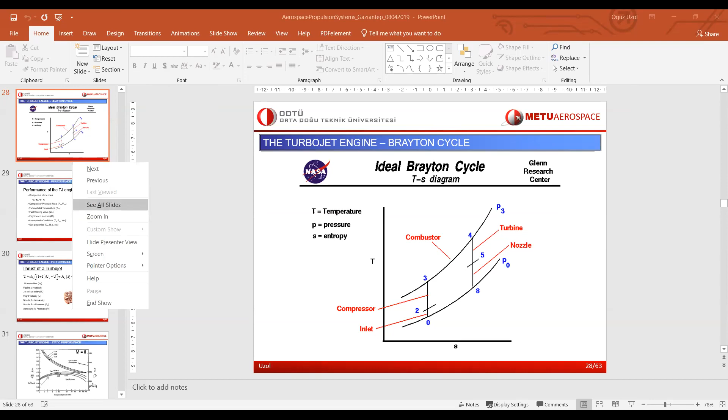However, have you seen the non-ideal cycle in propulsion? Yes, you have already seen the propulsion one. Let me get a pen. We did.

So the non-ideal cycle, of course, for those of you who attended last week's class, during the break we basically went down and took a look at the engines. You see that it has many components, and in this class we will discuss these components, but these components suffer from losses, okay? They are not ideal components, they suffer from losses, and these losses are not visible in this ideal Brayton cycle.

Whenever we have, first of all, do you understand when I say losses, what do I mean by losses? For example, let's say in a compressor - we can walk down and see the actual compressors downstairs - but in a compressor, what could be generating losses, for example? What do we lose? Total pressure.

Friction causes the losses, yes. But what do we lose? Energy, energy, okay good, we lose energy. More specifically, I can say kinetic energy of the fluid, and that also gets reflected in a main parameter that's a direct indicator of loss, which is total pressure.

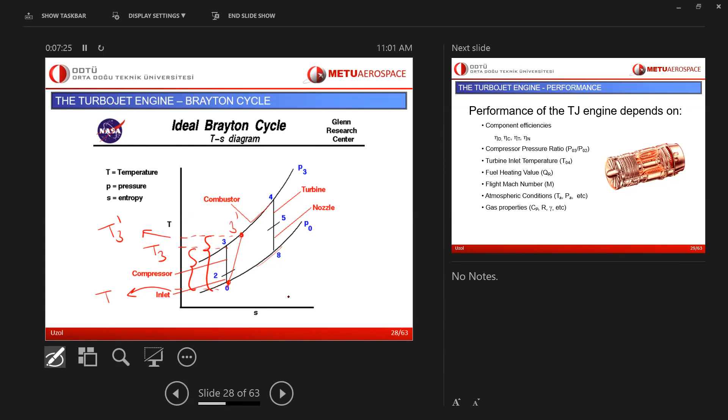So this is specifically about the compressor, explaining the difference between the ideal case and the non-ideal case. But similar arguments also occur for turbines. In this class, when we start discussing compressors, we will learn the aerodynamics of a compressor. Here we just say there are losses in the compressor that generated this non-ideal cycle, but where are those losses getting generated from? That's what we're going to learn in this class, going into more details.

Now, coming to turbine and nozzle. Nozzle is a little different, it's a simpler story because there's no rotating component. But let's focus first on turbine, which is another rotating component. On the right-hand side of the cycle, we see the 4 to 5 process, an isentropic process, a straight line coming down with no entropy generated. So similar to compressor, we do have losses in a turbine.

Mainly because of similar physical reasons: friction, viscosity, boundary layers on the blades, boundary layers on the walls, plus other stuff happening in a turbine. For example, we cool turbine blades, so we have mixing of coolant flow ejected from the turbine blade with the main stream, which also increases losses. Tip vortices, similar to compressors, we have all of this. So we have different loss mechanisms generating entropy.

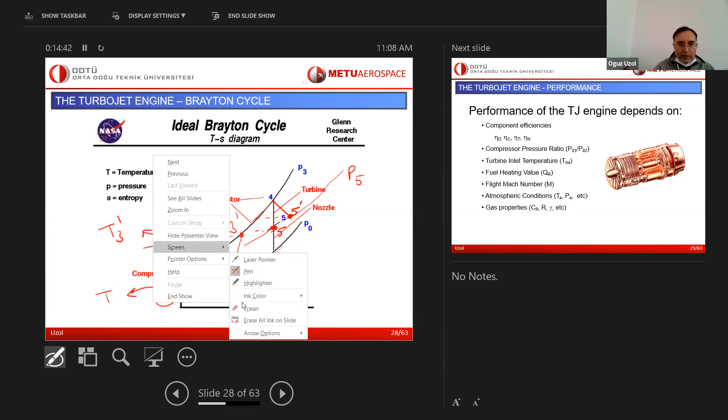In the combustor there's one issue. Of course entropy is generated, that's fine. But as you can see in the ideal Brayton cycle, during combustion we go from 3 to 4 on a constant pressure line. So we are basically assuming that pressure, especially total pressure, is not going to change inside the combustor. That is not true.

In reality, some of you have seen the actual combustors in our department hall. For those attending this week, you can go down and see the combustor geometry is quite complicated. It's not just a simple duct. It has holes around it that generate penetrating jets, high-speed air jets filled into the combustion chamber. Those high-speed air jets collide with each other, plus on top of that very complex flow region we inject fuel droplets. It's a very complex flow environment that also generates some pressure loss.

At the end of the day, the reflection on this cycle is that at point 4 we cannot maintain the same total pressure. In reality, in a non-ideal Brayton cycle, we operate at a slightly reduced pressure level. So 4 is actually, let's say this is 4 prime, here. So even if you reach ideally to 3, the path will go to 4 prime instead. So you lose some pressure inside the combustor as well.

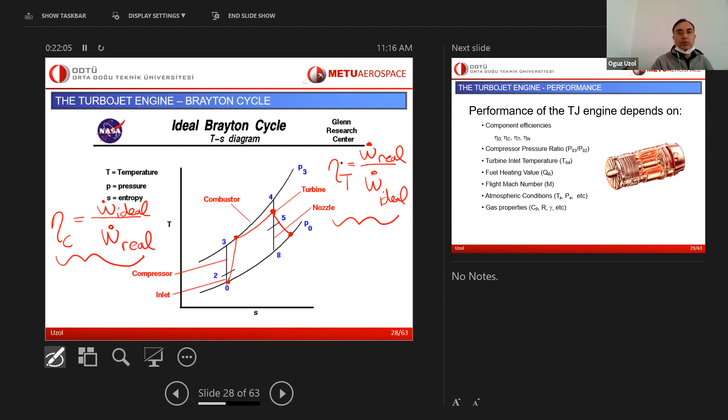So regarding this ideal versus non-ideal cycle and everything, these component efficiencies are very critical and they do show up in the performance equations. So when I say performance, again, as a review from last year, performance of the turbojet engine depends on all of these parameters, but maybe I should show this one first.

Let's remember this one first, the thrust equation, okay? Again, I'm assuming that you have seen this in propulsion one. Thrust equation for a simple turbojet looks like this.

There are many parameters. I think you actually derive this equation in propulsion one, but it's a function of first, m dot a. M dot a is the air mass flow that goes through the engine, and it is directly related to the size of the engine. If you remember, we discussed this also last week.

Plus, there's a parameter called F. F is what we call the fuel to air ratio. Again, just to remind you, F is just m dot fuel divided by m dot air. Okay, it's called fuel to air ratio.

Jet exit velocity, so UE is the actual, whatever jet exit you have at the exit of the engine. U is your, let's say, free stream velocity before the engine.

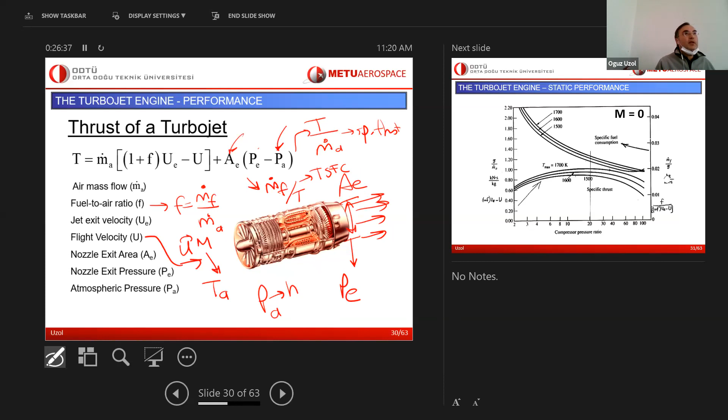So what is hidden in this equation is actually shown in this slide. You have seen these details, I believe, in Propulsion 1. Now if you detail this equation a little bit more, we see these parameters.

We see parameters related to components. First of all, efficiencies. Let me go over these points quickly, then we will give a break. The compressor, turbine, diffuser, nozzle efficiencies, everything is here.

Compressor pressure ratio - now that is interesting. We say P03 over P02. Generally, if you remember the station numbering on a jet engine, just in front of the compressor is station 2, and the exit of the compressor is station 3. So the stagnation pressure ratio, or total pressure ratio, 3 to 2, is what we call the compressor pressure ratio.

And it does show up in those performance equations if you work out the equations in more detail. Similarly, turbine inlet temperature - the exit of the combustor is station 4. Turbine inlet temperature shows up. We have fuel injection here, so heat addition Q is occurring here.

So therefore, what kind of fuel do we use? What kind of hydrocarbon fuel? Or do you use hydrogen or whatever you're using? The heating value of the fuel shows up in the equations. We have already talked about the flight Mach number, the flight conditions, and of course, gas properties.

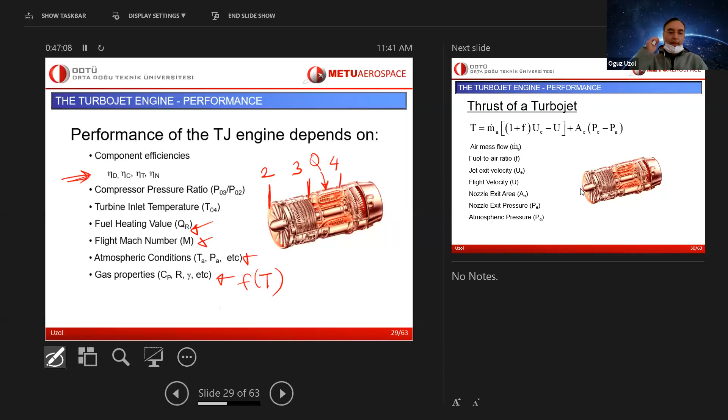Hocam, I have a question. Go ahead. In the Prop 1 course, we have always investigated the cases with the thrust formulation.

The second term was always comparably small compared to the first term. Is there an application or situation where the second term becomes comparable?

Second term meaning this pressure, AE, pressure difference term. Yes. Okay, let me explain it like this. Under idealized operating conditions, generally we try to keep this exit pressure close to atmospheric pressure, or try to make it equal. Then that term does become much smaller compared to the first term.

But of course, this completely depends on the exit pressure of the nozzle. Exit pressure of the nozzle is determined by the flow conditions inside. If you remember from the Aerodynamics 2 class, for example, when we discussed this converging-diverging nozzle, right?

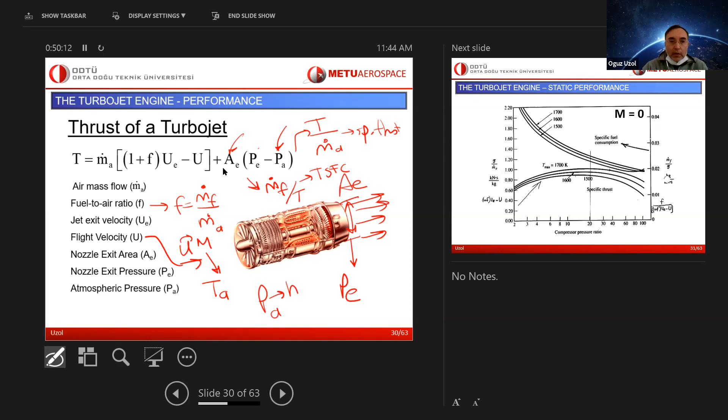Let's continue, but before that let me make one more comment. Going back to this slide, all of these parameters do appear in the performance equation. Now the question is: let's say I did some non-ideal cycle analysis for an engine, and that analysis gives me some thrust or specific thrust, some thrust-specific fuel consumption, and let's say those values satisfy my requirements. That's the first step in actual engine design.

The second step is that cycle analysis tells you that in order to achieve that performance, the engine should use, for example, a compressor with a certain pressure ratio. The question is, how are you going to design a compressor that generates this pressure ratio under different operating conditions? Will it be axial or centrifugal? How many blades will it have? How many stages? We'll define all of this later. So the second level of design is to design this compressor to match the cycle analysis, in terms of pressure ratio.

That compressor will also require a certain amount of power, which will be supplied by the turbine. This means the turbine has to be designed specifically to provide that amount of power. So how many stages of turbine should I design? How many rotor and stator blades should the turbine have? We have to determine all of this.

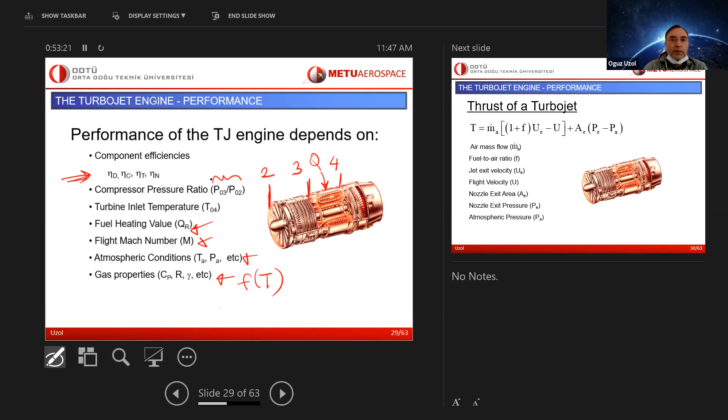And above cycle analysis, what do we have? We have the performance of the aircraft. This aircraft could be anything, as we saw in many examples last week — it could be a supersonic missile or a low subsonic aircraft. Depending on what we need, the aircraft has certain needs or requirements in terms of its propulsion system, and those are reflected first into the cycle analysis, and then into the component design of the engine.

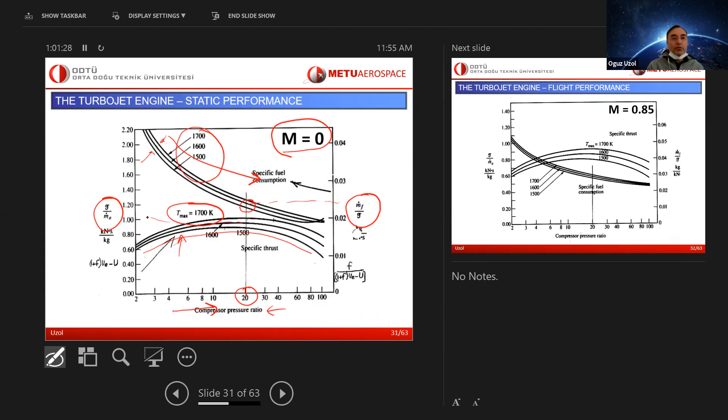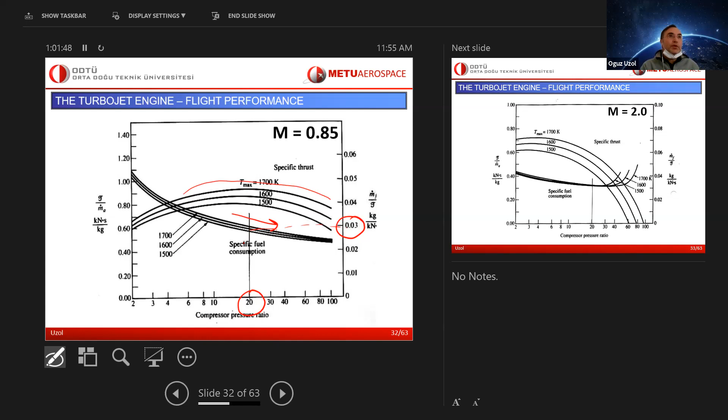So this indicates not a second parameter - not only compressor, one of the components, compressor pressure ratio in this case - but also flight conditions do affect the engine performance as well.

If you go to higher and higher Mach numbers, Mach 2, Mach 3, of course we go to a case, of course, without an inlet - this is just thinking that we do not have an inlet, so the compressor inlet is actually at Mach 2, which is not realistic in reality. We have to have supersonic intake design and everything, but we will see that story later. In any case, if you go to higher and higher Mach numbers, this turbojet engine - all those equations we have seen - its performance drops drastically, which should give you the message: don't use a turbojet if you want to fly this high, these Mach numbers.

Use something else - what is that something else? If you remember last week, I showed you some plots. For example, a ramjet is a better option in that case.

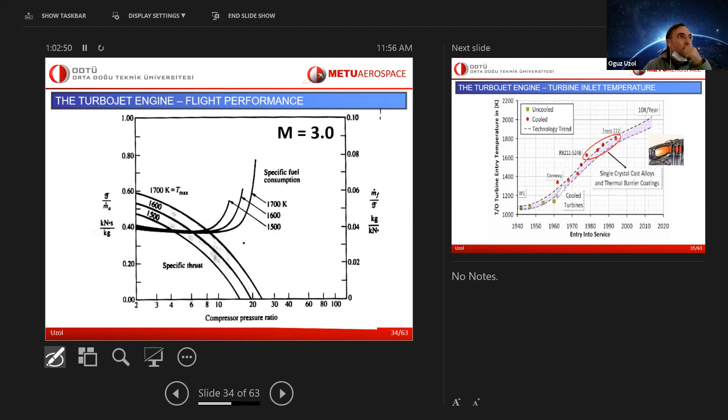Just quickly, regarding the turbine inlet temperature development, historical development. The x-axis is years from 1940s to 2020s, and the y-axis is the turbine inlet temperature, or turbine entry temperature, in Kelvin.

Back in the 1940s and 50s, we are talking about the first or second generation turbojet engines. I've shown you some examples of aircraft like the ME-262, the first jet engine fighter aircraft, the F-4s, F-104s. In those engines, turbine inlet temperature levels were around 1,100 Kelvin or so, which was quite low compared to today.

For example, here in 2010, 2020, we have around 2,000 Kelvin. Of course, it makes a big difference in engine performance, but we achieve this through introduction of a variety of different technology levels. Cooling is one of them.

Here we have uncooled and cooled versions. Green squares are uncooled. For example, in 1960, we have an uncooled engine compared to a cooled engine. You can see we can increase the temperature level almost close to 200 degrees Kelvin. And the cooling technology, of course, it's a big research field.

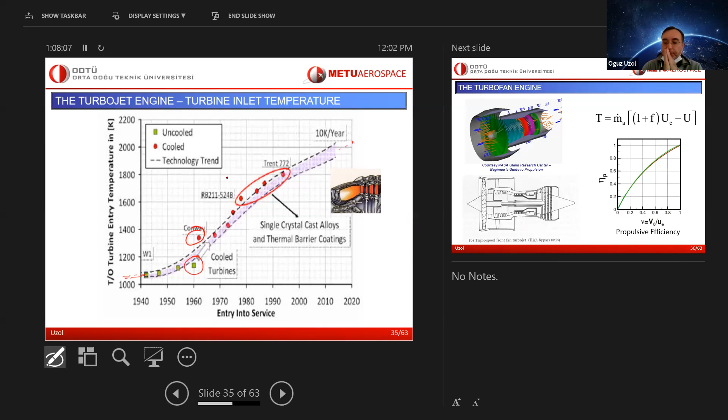Now, just a quick recap of what I call spin-offs of turbojet engine technology. One of them is the turbofan. A turbofan engine is what you're seeing here, and of course the thrust equation is basically the same—you don't see the second term though, only the first few terms, not the pressure difference term.

The design philosophy of a turbofan engine is different—recapping from last semester's propulsion class. The design philosophy of a turbojet is to generate a high-speed jet at the exit, UE, a high UE. The design philosophy of a turbofan is not that. The design philosophy of the turbofan is to generate the same amount of thrust with a low UE.

Then the question is, if UE is low, how are you going to generate the thrust? Well, UE is not your only option. In the equation, we have another very strong option—that second option is mass flow rate, m dot a.

You can keep UE minus U low, but if you have a high enough m-dot air, you can still generate the same amount of thrust. That is the design philosophy of the turbofan engine.

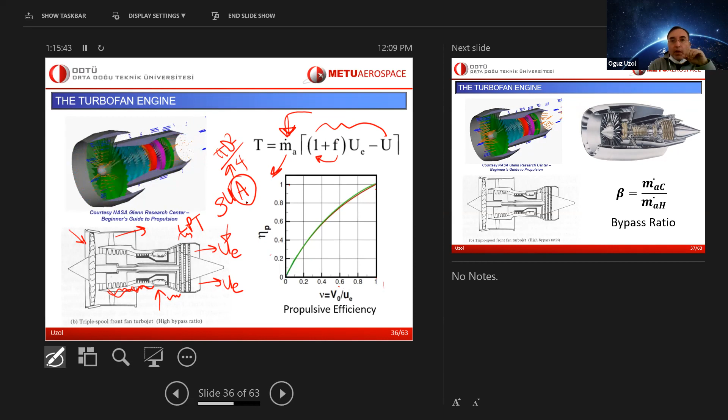An important concept to remind you of from last year is the bypass ratio in a turbofan engine. It's the amount of cold air mass flow, shown as the blue streamlines here, compared with the amount of hot air mass flow, shown as the red streamlines in this animation. What is a typical bypass ratio? Do you have any idea? Do you remember?

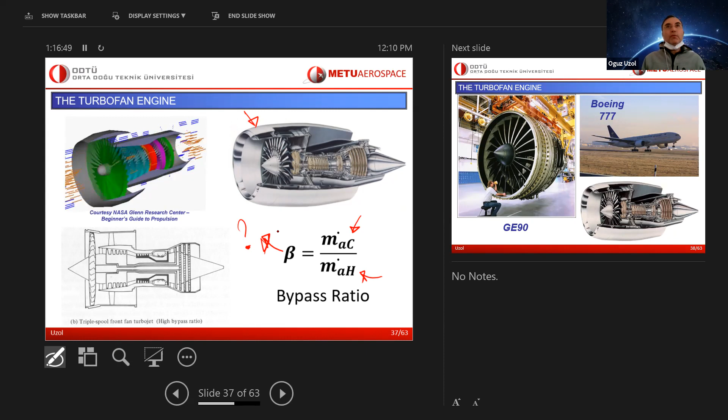For this engine, for example, this is a GE90, a typical passenger type turbofan engine. Its bypass ratio could be 7 or 8, typical numbers being 5, 6, 7, or 8. These are what we call high bypass ratio turbofan engines. Beta is what we call bypass ratio, which indicates that there's also a category of low bypass ratio turbofan engines.

When I say low bypass ratio, what is a typical number? Any ideas?

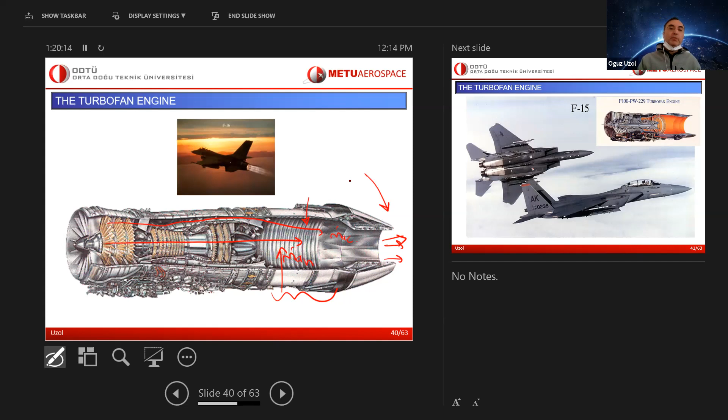So okay, one more. If we go one more step, we come again to remind you of the turboprop. Inside the turboprop, exactly like a turbojet: compressor, combustor, turbine. It's very similar to a turbofan. First of all, in a turboprop, again, the design philosophy is not generating a high-speed jet. No.

We put a second turbine also at the exit of the first turbine and extract energy again. But this time we are not driving a fan, but we drive a propeller in the front. Okay, now turboprops have advantages. If you remember the plot that I showed you last week, at relatively low flight Mach numbers, 0.4 to 0.5, it's more advantageous to use a prop instead of a fan.

So here, this gas turbine engine technology, the second turbine drives a propeller in the front. So it's basically a propeller-driven aircraft, but since it's not driven by an internal combustion engine, the RPM levels and aerodynamics are a little bit different, but it gives you enough propeller power to fly at high enough Mach numbers.

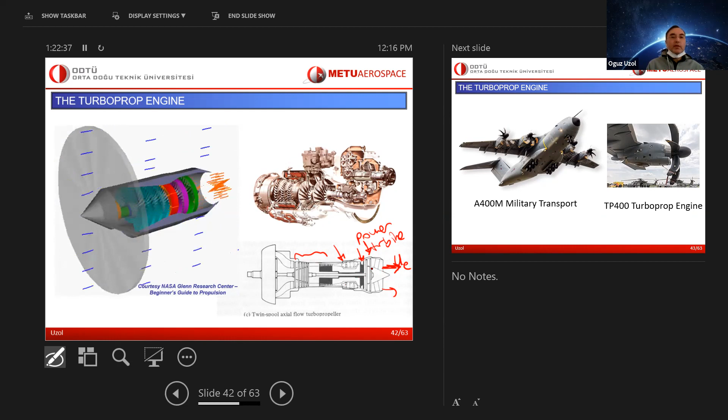Turboprop aircraft is a special design. The best example is this A400M military transport aircraft. Tusaş and TEI participated in this project for a long time, producing parts of the engines and the fuselage. The Turkish Air Force also uses this. Turkey was part of this project. It uses the TP400 turboprop engine.

It's an air-breathing gas turbine engine. Here you see the air inlet, where air goes in. The exhaust is somewhere at the back, low speed, but these propellers are very specially designed. You can see these propeller blades don't look like, for example, a Cessna aircraft's propeller blades. These are advanced transonic propellers, swept back like a transonic wing to manage the shock waves that occur. So their RPMs are quite fast compared to regular propellers.

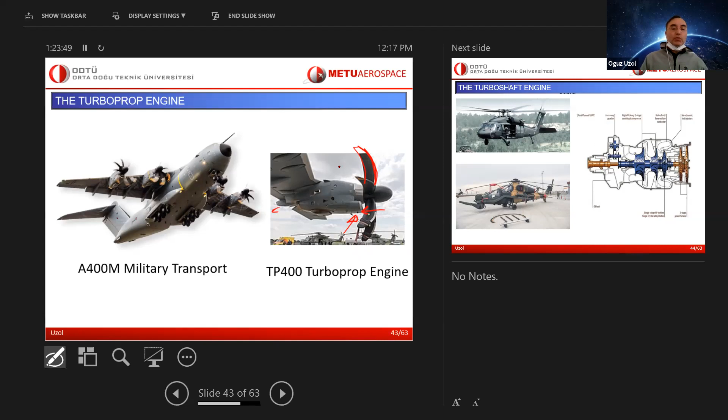A similar engine to the turboprop is the turboshaft, which we use for helicopters. We have two turboshaft engines at the entrance: one is the Rolls-Royce 250, C250, and the other is the T700. The GE T700 engine powers the Black Hawk helicopter, and it's just downstairs - we can talk about it after class for those who are here today. This is the ATAK helicopter, which uses two T800 engines.

It's a bit more advanced version of the T700, very small, very powerful engines. The internal cycle and design is like a turbojet, but it looks a little different because the compressors are not axial most of the time. For example, in this engine we see a radial compressor, a two-stage radial compressor, driven by an axial turbine, with a combustion chamber embedded in between.

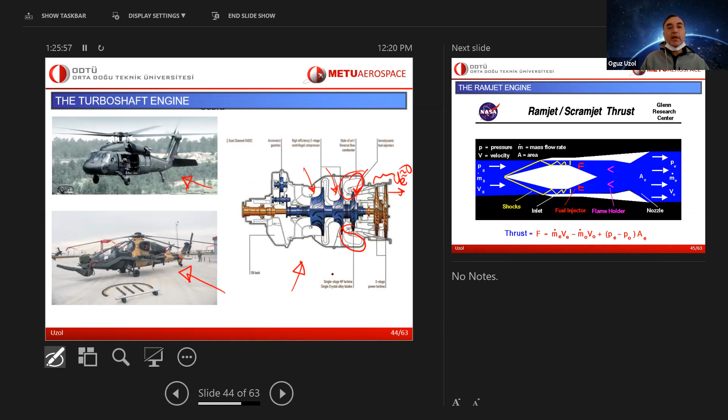After the first turbine, this blue shaft is basically hosting the compressor and the turbine. After that, we have the orange shaft with the second turbine, similar to the turbofan and turboprop, but this turbine now extracts almost all the power. There's no optimization for the exit velocity at all - it's practically zero. If you look at the exhaust of a helicopter, it's just like your car exhaust, hot gas slowly coming out, because this second turbine extracts almost all available power in the gas and uses it to drive the main rotor and tail rotor of the helicopter.

That's why it's called the turboshaft engine - it produces shaft power. In some turboshaft engines we have hybrid compressors, for example axial and radial, and those are what we have downstairs in the hallway in the aero department. In terms of cycle analysis, the geometry isn't different from a turbojet. However, in terms of component design, you need to design a radial compressor, which is quite different from designing an axial compressor. That's why we'll learn this in this class - we have the axial compressor subject and the radial compressor subject, and we'll see the differences in flow physics and all that.

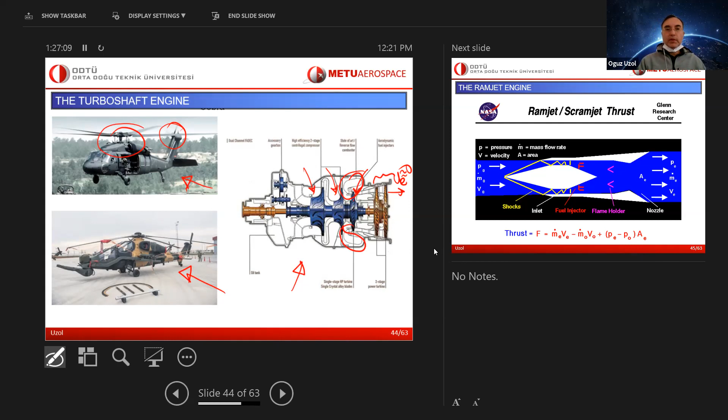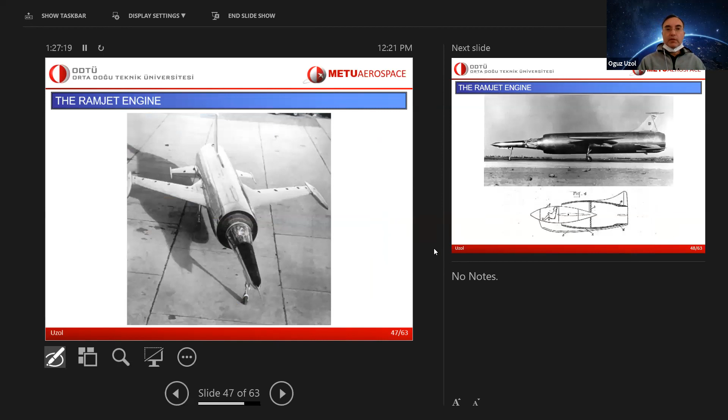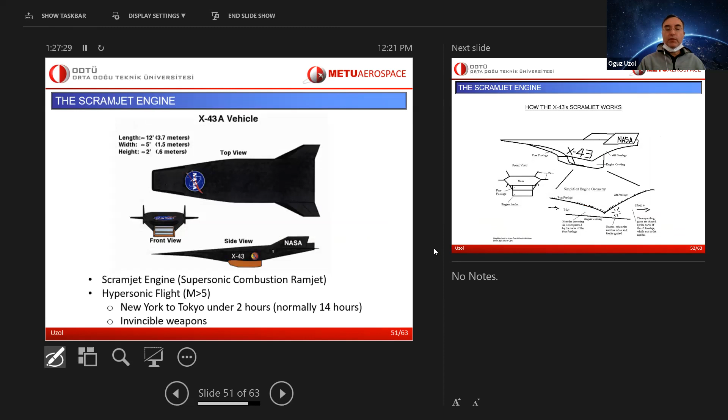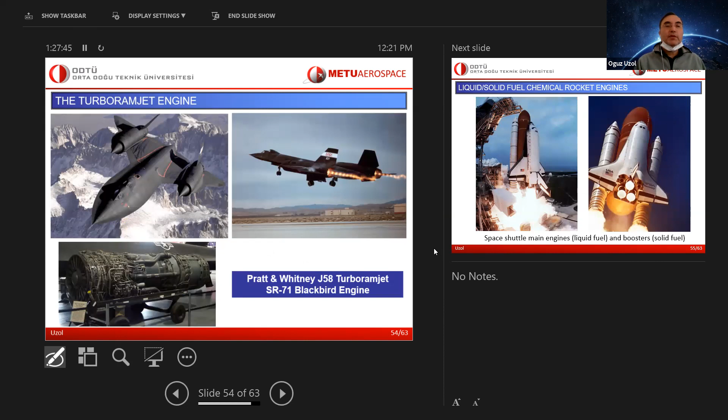The rest of the slides are a little less relevant, so let me skip quickly. Those are mostly ramjets, scramjets, some examples from literature, from missiles, ramjets, manned aircraft, some crazy manned designs. This is the scramjet, for hypersonic speeds. Let me pass through. And a hybrid engine, for example for the SR-71 Blackbird - it's a turbojet and a ramjet. This is the fastest flying manned aircraft, Mach 3.5, and also rocket engines, a bit out of context for this class.

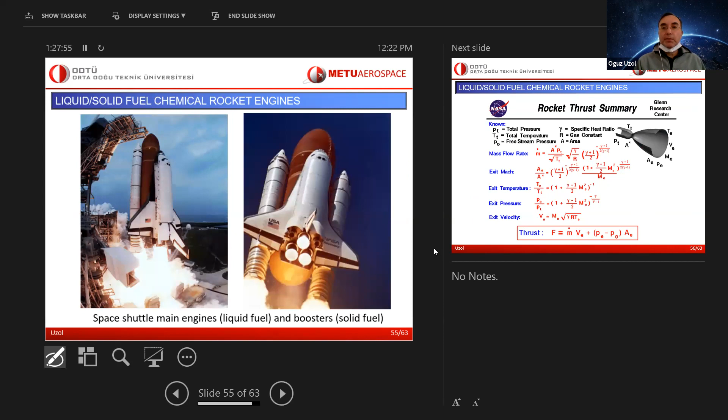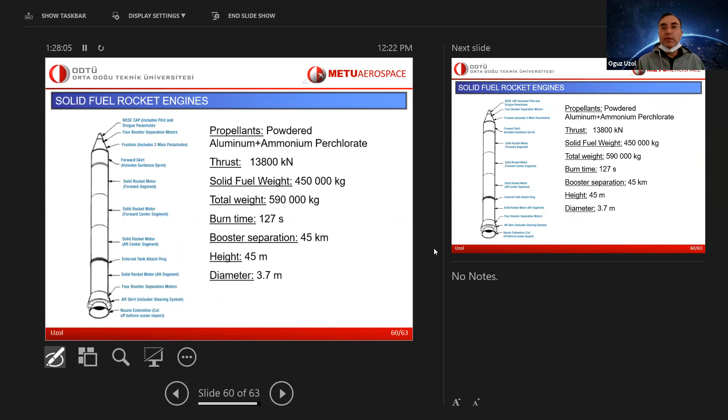But some things like the nozzle design and everything are applicable. We will talk about these, and electric propulsion, towards the end of the semester.

Any questions? In class or online?

Okay, let's stop here. We'll continue next week's class because we don't have class on Thursday.